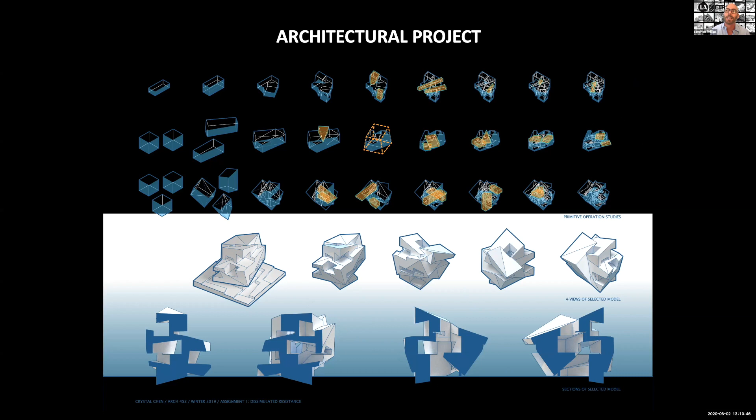Just to give you a quick brief on what our projects generally run about. I always start, since they're 2 quarters long, with a formal assignment dealing with primitives and semi-pure geometries, working to create an architectural form that has interiority and exteriority and creates different formal shapes. Everyone develops their own project, lands it into a site, and that becomes an architectural interest they take into the design project as they develop it.

We initiate a program a few weeks into the class, and it's usually quite large. This is fourth-year students, undergraduates, BArch. It's an urban design type project within Los Angeles.

Our program this year is 660,000 square feet. It's a multi-income housing project with 2 hotel components, a transient hotel and a boutique hotel. We also have social and health services built in, transitional family housing, creative office spaces and retail spaces, and substantive public interior and exterior urban spaces of the in-between. That's what the design tends to be about.

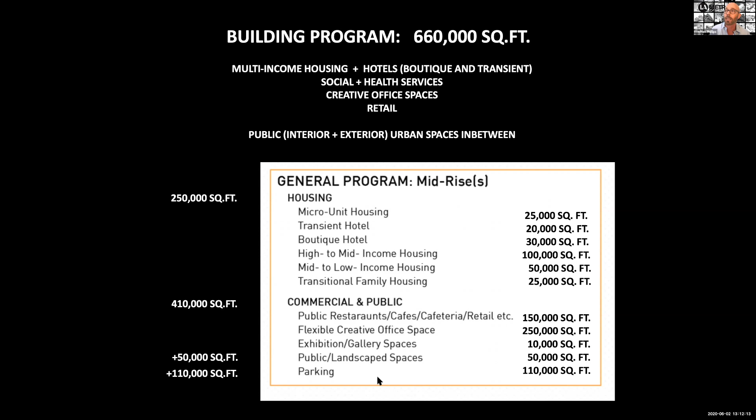About 250,000 square feet is given over to micro units, transient hotel, boutique hotel, high to mid income housing, mid to low income housing, and transitional family housing. There's also commercial and public spaces, restaurants, cafes, office space, exhibition galleries, landscaped public territories, and parking. The site is in downtown Los Angeles.

Here's downtown, here's Skid Row, this is the fashion district. We sit on that edge condition between this larger high-rise territory and the move towards low-rise, more industrial kind of environments.

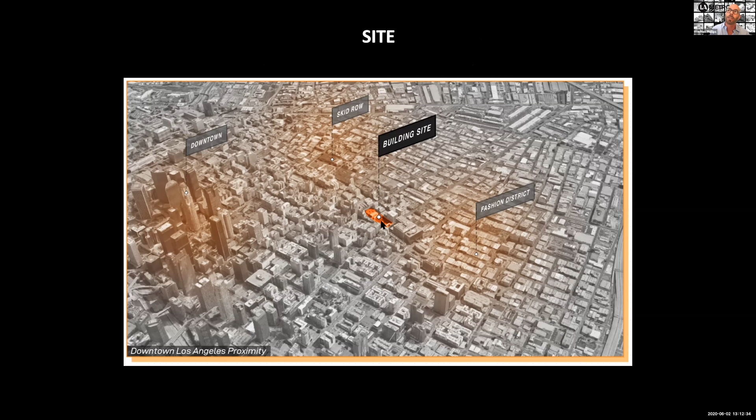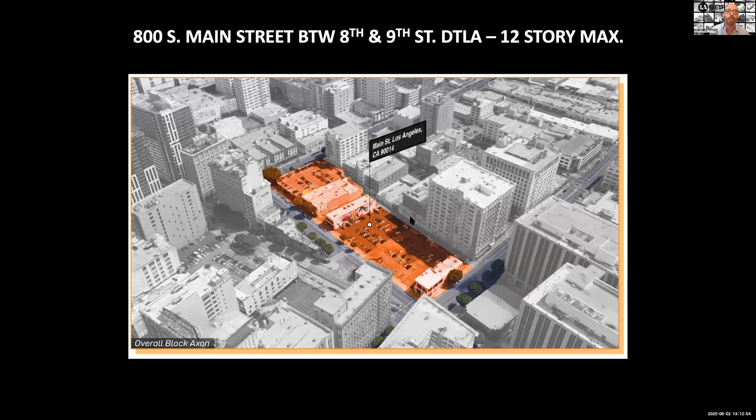It's on a street right off of Main, between 8th and 9th Street, and it's pretty much a fairly empty lot. We've taken the entire lot for the student project. It has this interesting open space right in front of it, and we took the general standard of a 12-story building max for the project as a whole.

This gives you an idea of the lot off of Main Street between 8th and 9th, with an alley running behind it. Generally speaking, it's a 12-story project with 660,000 square foot coverage and a 110,000 square foot lot, so we have about 50% porosity.

It's guaranteed they're going to have to manage a type of open indoor-outdoor space, also with hotels and housing usually requiring a more narrow kind of spatial feature than the lot. The lot itself is 175 by 625 and has a very strong elevational quality.

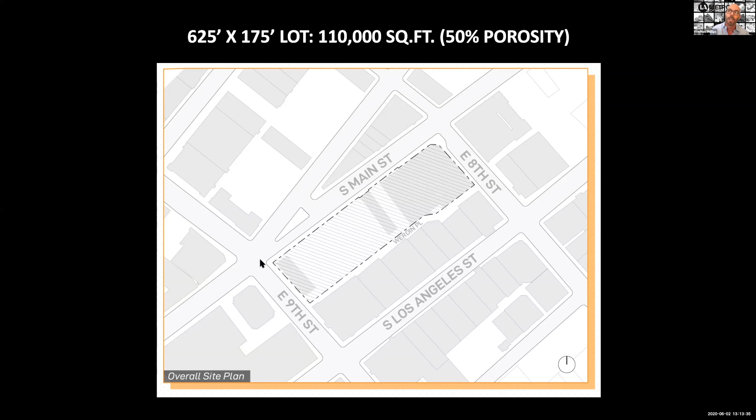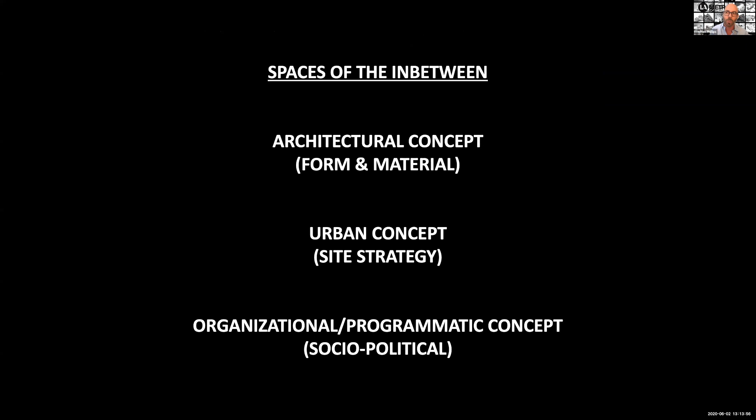The topic is really about those spaces of the in-between, and how we design and inhabit them in relationship to, one, having an architectural concept that's form and material; having a strong urban concept that deals with site strategy; and then maybe a socio-political perspective, usually through how you organize and program the space.

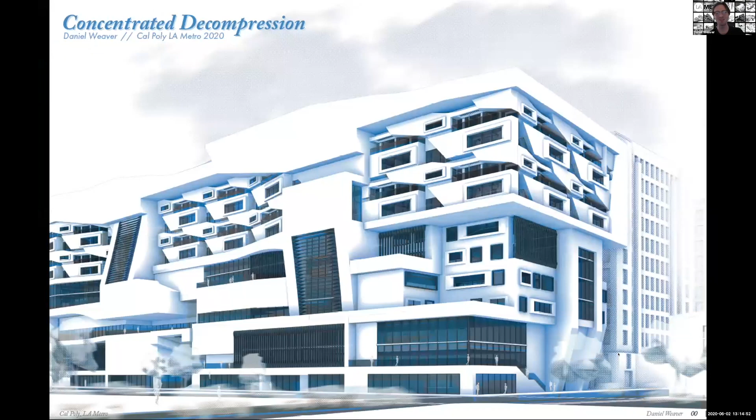Stephen already covered a little bit about the site and what was happening there, so I'll cover that pretty quickly. Essentially the site is located in the Fashion District in southern downtown Los Angeles, and it currently hosts a mix of retail and restaurant space, as well as office space and light manufacturing in the adjoining buildings behind. The unique difficulty of the site is presented in the dimensions of the elongated block, nearly 625 feet long by 175 feet wide.

In addition to the elongated site came a complex program. The building is mixed use, containing retail and restaurant space,

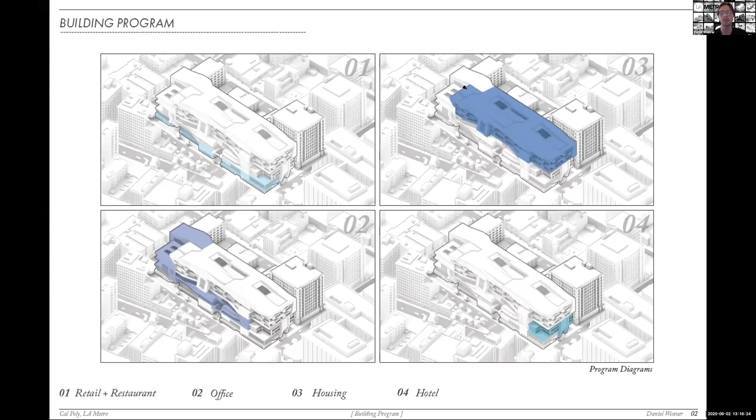a boutique hotel, a transient hotel, creative office space, and a range of housing units, including transitional family housing and micro units. Because the program was so complex, in order to give clear organizational strategies to the building, I played off the existing context by placing retail and restaurant on the bottom floor, then topping that off with creative office space. Finally, the hotel spaces populate the right side of the building towards 9th Street, with the housing units merging towards the top area.

Along with such a dense program came challenges of decompressing the space in order to provide moments of rest in the nearly 660,000 square feet of program.

So explorations of initial formal studies of the project revealed the unique potential to erode the interior of a mass through the differencing of objects through the exterior. This erosion of the interior space not only acts as a decompression of a dense object, but results in a unique inside to outside relationship with these void spaces.

Following through on these formal studies, the building creates void spaces to serve as a programmatic and spatial decompression inside. As seen in the diagram, the voids take advantage of skylights on the top and covered exhaust on the side to bring cuts through the building, adding internal porosity, natural light, and fresh air. In addition, they create a great ability to transition programs across the floor plates.

Taking a look at the ground floor plan, it doesn't take full advantage of the programmatic divisions using voids, so the building itself cuts back in a similar way to provide porosity on the ground level. Here you can see an array of retail and restaurant space, as well as the lobbies for all the programs above.

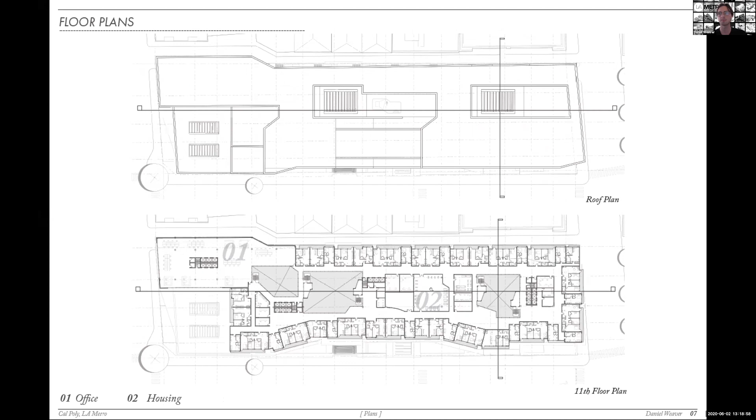As we take a look at the cross section, it was really important for me to take advantage of the open space, the voids inside the building, in order to blend the vertical divides between contrasting programs and communities.

These same connectors can act as programmatic connectors as well, with a more tailored program to that. For example, using something such as a cafe and seating above to draw people from maybe an office space and housing units to occupy the same area together.

These spaces were very vital to the building as they create opportunities to share interactions between contrasting communities and provide opportunities to blend the dense program.

Finally, getting into a little more detail, the building uses a steel structural system on the left side with large, about 7-foot deep trusses spanning on the 6 floors as well as the roof to help span over top of the large voids and the porosity on the ground floor of the building.

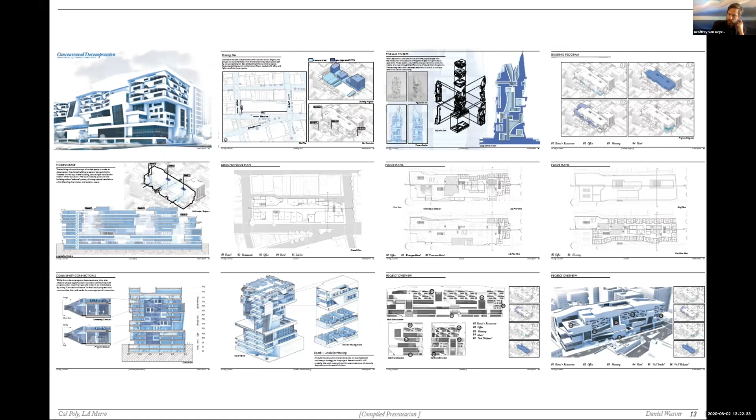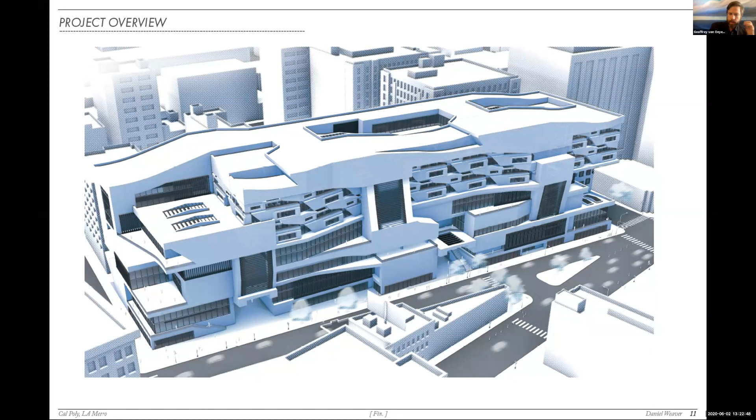Could you put your final image back up there? Yeah, I think the way that you illustrate some of the housing units as these smaller, highly unitized elements on the facade within these larger programs that are slotted together sectionally, and the way the cross section of the building reveals those mixed community amenities, I think that's quite successful. That's working from a massing and a spatial quality as well.

I'm wondering if you have any other images that might show what that looks like on the inside of those voids and what those void spaces might look like.

Unfortunately, I wasn't able to finish the interior render for that area, so the cross section is one of our best shots. You can also see it if we look at the detail chunk. You can begin to see the void being cut through on the left side here, and get a 3-dimensional concept of those programmatic spaces punching out into the void.

But as you were saying, that was a very important part of the program to me, because the program was so dense. It was actually really tough to figure out ways to give the programs the space they needed without entirely isolating them from each other. That's where the voids provided a really great opportunity for that.

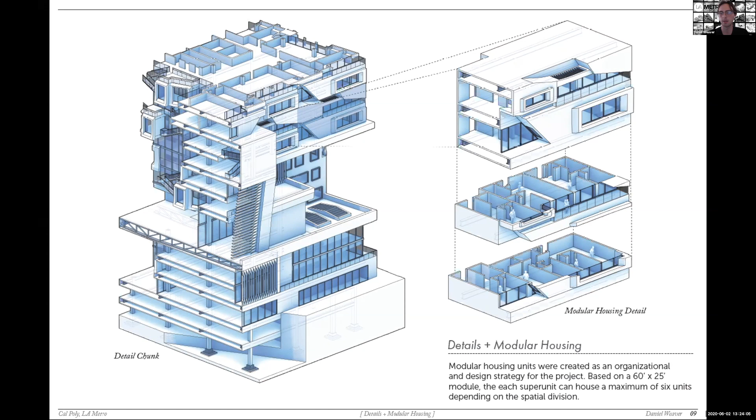One thing I can't tell is inside of those voids, and maybe a longitudinal section through the void would show it as well. I'm trying to see if the interior elevation created in that void space has the legibility that the exterior envelope has, since you've been working to create quite legible exterior massing. Is that to be as legible on the interior, or are you blurring the programmatic differences? What is your intent?

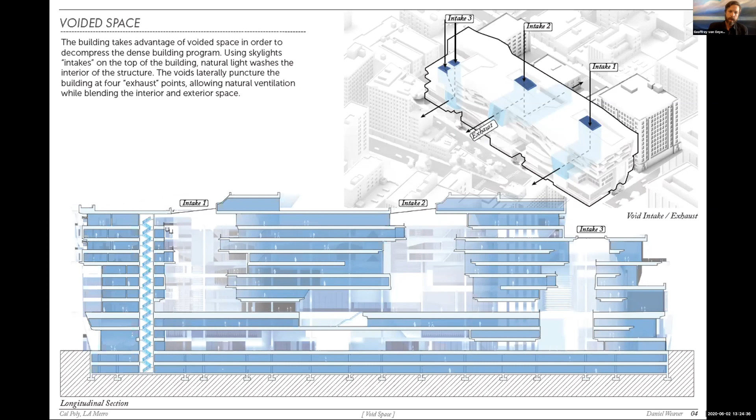If we take a look at the interior, I think one of the things I wanted to bring from the outside was this idea of wrapping coming in, which is these white objects right here, which are not the community connectors but help divide up the glazing on the inside. But I think that's actually a really good point I didn't consider, bringing the exterior facade language onto the inside and continuing to show that programmatic change through the interior atrium.

I think you did a good job on the exterior of modulating the different scales and showing the programmatic relationships on the facade. The interior seems more two-dimensional or something, in the sense that you are illustrating a relationship between glass facade and program shared spaces. I think the richness of the exterior programmatic form relationships could be better articulated on the inside.

But overall, compliments on the project. Very thoughtful. Thank you. Yeah, I agree.

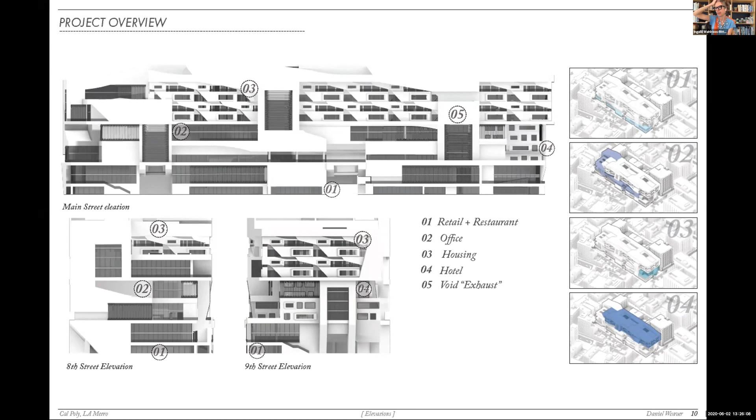I think the modular strategy that you described is a very good one. And as Jeff mentioned, there's a clarity and you begin to understand the pieces and how they come together when you see these overview shots.

There were two pieces I was particularly interested in. One was your formal study that was early on, and I thought the clarity of that diagram was great. I have to say I missed it a little bit because there's a whimsy to it, or a clarity...

That is missing, and I do think it's these internal spaces that get blurry. In this diagram, the figure-ground relationship is clearer, even if the interior spaces are less traditional atria, I think they make for more interesting architectural spaces.

So I wonder if some of these ideas might find their way back into the project as you begin to skin those interior courtyard areas. Yeah, that's actually a really great point. Self-critique is really important as you finish up a project and start producing things. I agree the void space did start to lose a little of that whimsical quality.

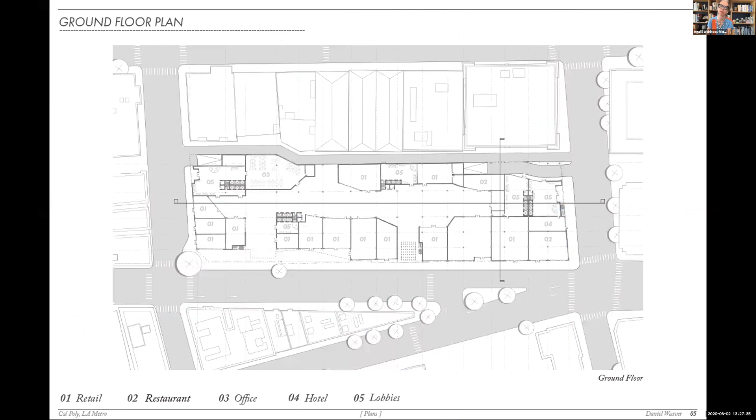It gets a little mushy also, and here there's a clarity to it that I really like. The other piece is the connector piece, and I think you could really amplify those. You need to commit to them and understand them. I feel like they don't have enough personality.

I wonder if a material, a color, that there's some, they almost look like they could even be mobile. Maybe I've watched too much Harry Potter with my 11-year-old, but the idea that these pieces could actually begin to, there's almost like a plug-in idea for it. I'm just throwing that out there, I think they could do more for you.

Maybe I'm falling back on less architectural and more playful suggestions, but architecturally, doing that will give you a richer programmatic blend—what happens when housing encounters restaurant. You could really use them as ways to test out programmatic overlap where there's discomfort, but really heighten that, especially in today's circumstances.

Anyway, congratulations on the project. It seems to me those are two areas that you could really amplify even further. Yeah, thank you very much.

I think your comment about the idea of moving less towards architecture and more towards playful design is a really good critique for the project.

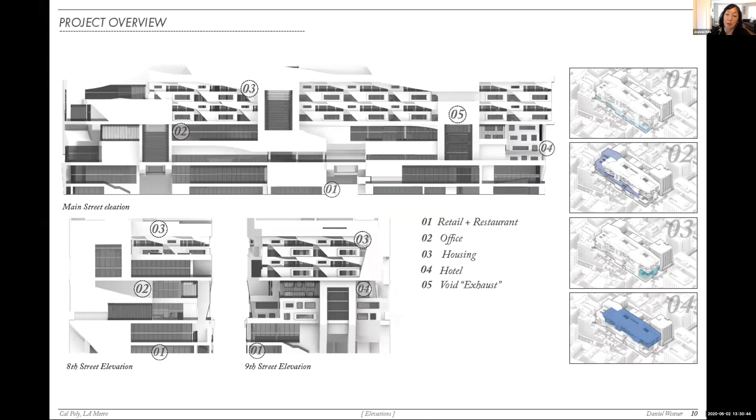As an extension of that, I think one area that maybe could have started to percolate is on the overall massing. Is there a way for these things to get a little larger and start to create almost these urban rooms? I know you have them at street level, but I don't know this site.

I was thinking in particular about the alley edge and the proximity of the buildings behind it, and wondering whether a larger urban voiding strategy that punctures out of the facade might have been a way to start blending, as you were saying, program, but also blending edges between the project itself and some of the things it's aligning with on the site. Yeah.

Yeah, that's a really fabulous point. I think being able to take that same strategy and apply it as an urban strategy, or bringing those voids down and out onto the site, is a great idea—something I didn't consider as much while working through the project. So thank you for that feedback.

Hey Daniel, this is Tom. Hi Tom. I'd like to echo the three previous comments—congratulations on a great project. It's very articulate and a beautiful presentation, so thank you for the clarity of the drawings. It's really nice to see the work.

My comments are similar to the previous ones, relating to these open spaces. I thought Ingalill's comment about the transition from your earlier studies to this more modular system was great—you're doing a good job breaking the scale down, but I think you're losing a bit of the balance and sculptural qualities from your previous study. As it becomes more fragmented and nuanced, it'd be great to work some of the larger gestures back in as you carve the spaces out.

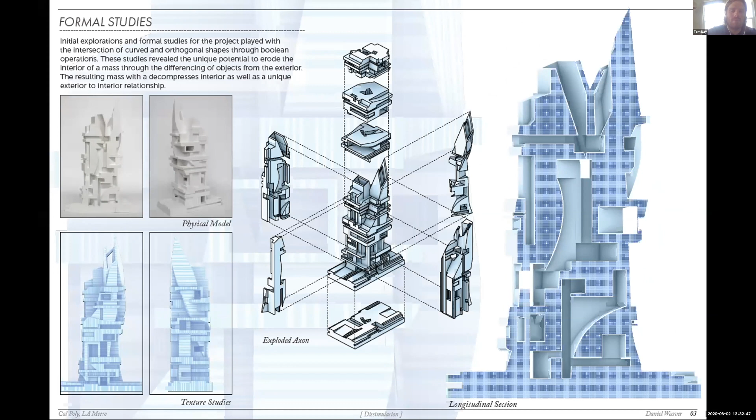The next point is about your void spaces—could you go to this section? The cross section or longitudinal? This is perfect. I think it's really great how you've activated the interior of this building, and I especially like the elevated piano nobile, which could offer a whole range of possibilities for this augmented piece of landscape on an upper level.

If you know this site at night—not right now, but typically on a normal weekend—there's a very busy intersection where all these commercial and retail spaces come together. This opportunity to draw the public up into other levels of public program in the building is fantastic.

I can't help but think there's a missed opportunity in going down as well as up. Right now you're using the ground plane as zero, with parking below and the project above, but it could be a fantastic complement to this intricate space you've created, with a pedestrian entering the building looking up and down at these juxtaposed programs.

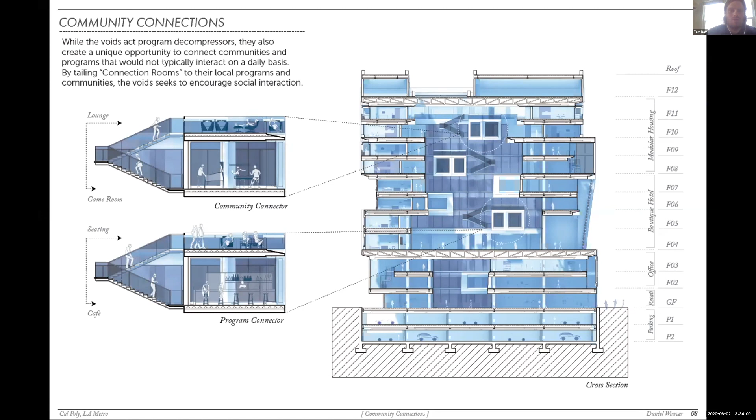Also, if you could go to the overall image—this is just a comment about the ground floor. I think some of the intensity you have in section is lost a little on the ground floor plan. I understand you're bringing in a lot of retail, but you're making this great move of creating new public spaces up and down from the street level. I think you have an opportunity to void out more of that ground floor space and bring more of the public up into your building.

I think the commercial retail storefronts you have aren't necessarily strengthening the very powerful project you've made. That's just a minimal, slight critique, but overall, great project—thank you very much for the work.

Thank you very much, Tom. If I have a chance to respond, one of the things I was struggling with while creating a building in an urban context was the idea of holding a site boundary, for safety at night when people are walking around—your idea of opening it up to a large space makes sense, since it's the small nooks and crannies that become dangerous. But bringing those voids down, creating void space not only up but also down, could be a wonderful complement to the building. So thank you very much.

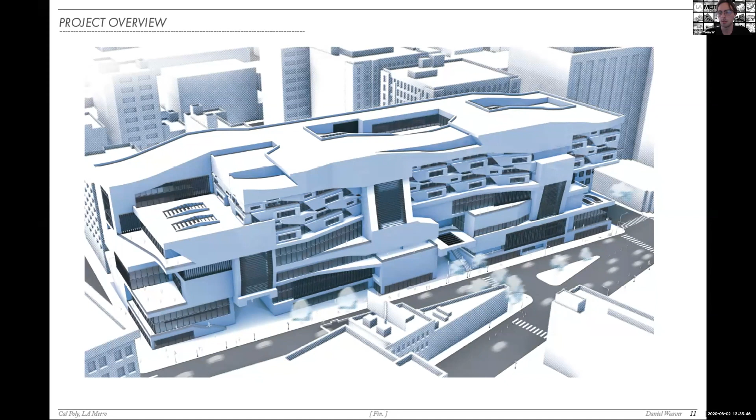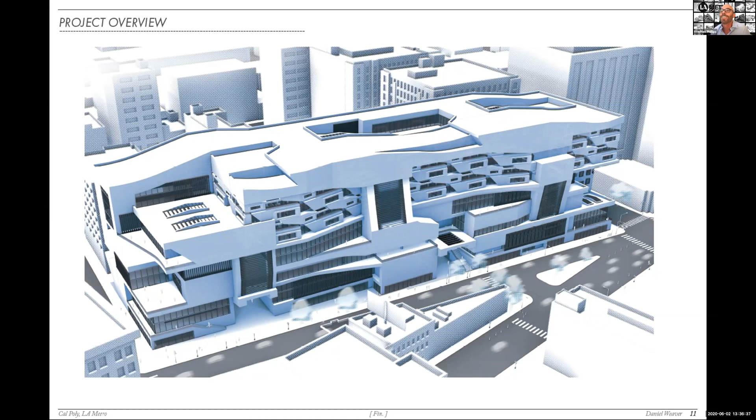I think that was a really great review—thank you for the commentary, everybody. Danny, you've worked extremely hard, so I'm really impressed the whole time. You're very consistent too, always have been. I agree with Ingalill's comment and the rest of the group—I've been pushing on you endlessly about how cool the starts were, that first project and the spaces. Most of our students struggle with that kind of interiority of the building having shape and being okay with that. I'm not sure exactly what that is, but I think you've pushed yourself really hard, and this project came very far. Everyone's noted lots of clarity in the way you present this work, probably one of the most outstanding on that level. So thank you, and we're going to move on to Reann.

Are you there? Great, thank you Stephen, here we are. I'm here—great, so you can start sharing my screen. Yeah, okay. Sorry, give me one.

I also want to say before you get started, Teddy, Ismael and Pavel are out there in the group. If they want to, at some point, say something, please make your comment. There they are. We're hiding ourselves, so it's just the critics, so we can take the photos.

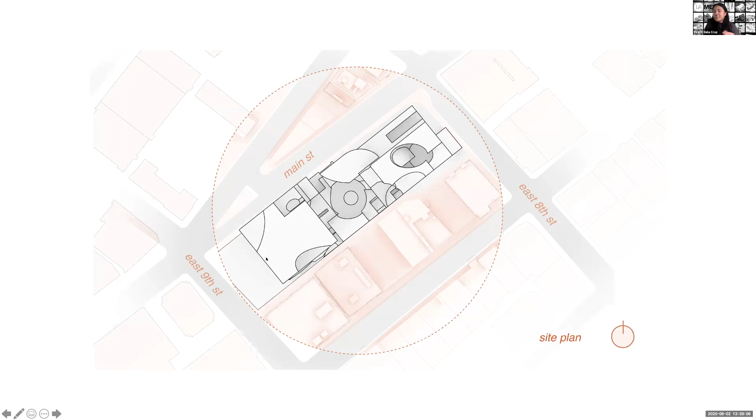This is my site plan and how the building sits on the site. I wanted to allow different areas of the site to be open to allow that permeative movement to be embedded within the program and the building.

Bringing in the idea of that collaborative core, I wanted to lay these programs out in a way where they were able to interact with one another in a respectful and appropriate way, allowing different spaces and the cores themselves to be flexible.

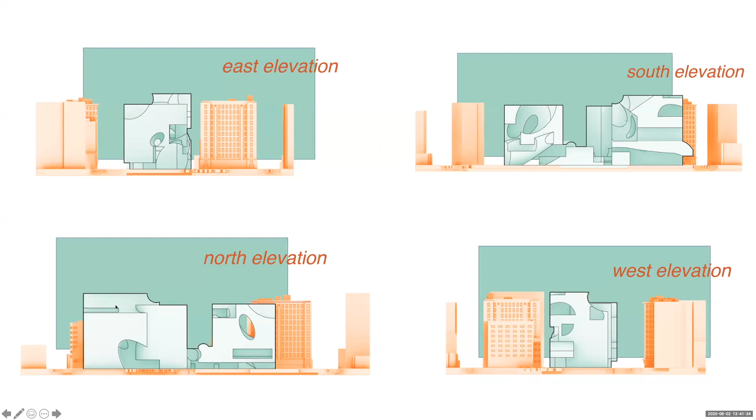These are the elevations I've produced. I wanted to find a balance between the monolithic quality of my building, but also allowing for that permeative movement to be evident. There's open space and the building is essentially split in two, but there's still a sense of connectedness that I wanted to implement and make evident in the design.

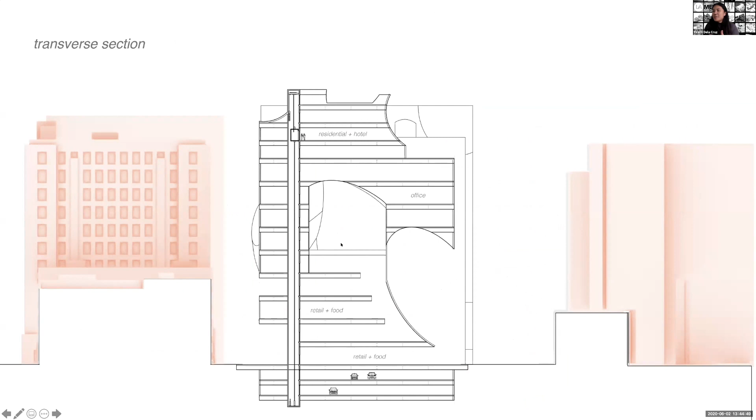So the gradients I've articulated here are those shared spaces between the different types of housing, hotel spaces, and public spaces like a library and a reading nook. In my cross-section, I wanted to articulate that atrium space - it's still being developed, but my goal in having this atrium space is to have it be inhabited, not just as a void space. That's something I want to continue pursuing.

So thank you for your presentation, Reann.

So you probably know this, but a core in architecture parlance is typically the elevator, the stair - it's a physical solid. And you're using core to define these voids, to describe these voids. I think the idea that a void is a core is an interesting one. But then in some of your later plans, you put an object or the elevator conventionally in the middle of that space, and it seems to me that's kind of violating a little bit of your idea of these spaces.

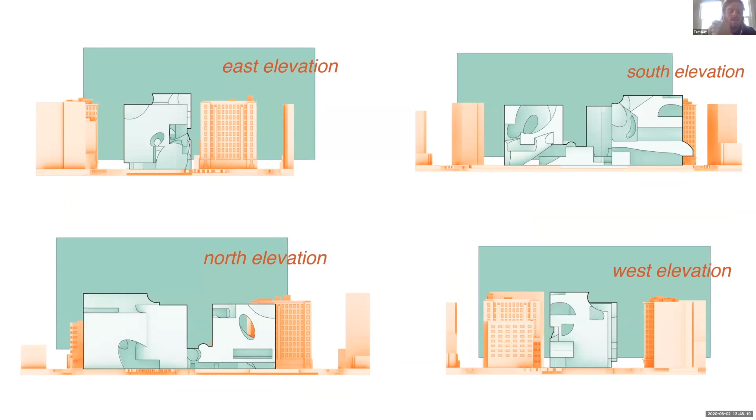In this case, you're kind of purely subtracting. But as you're breaking up these plans and looking at the program, it feels like you've just taken this plan and applied program to it. But I'm wondering if some of those programs can start to take on certain characteristics of the subtraction or the additive.

And so when you're thinking about the core as a void, that's a great idea, but also your elevator shafts — do they always just need to be something offset somewhere in the middle of the mass, or can they express themselves as more additive, solid pieces that help develop your language to be both positive and negative subtractions on your mass overall?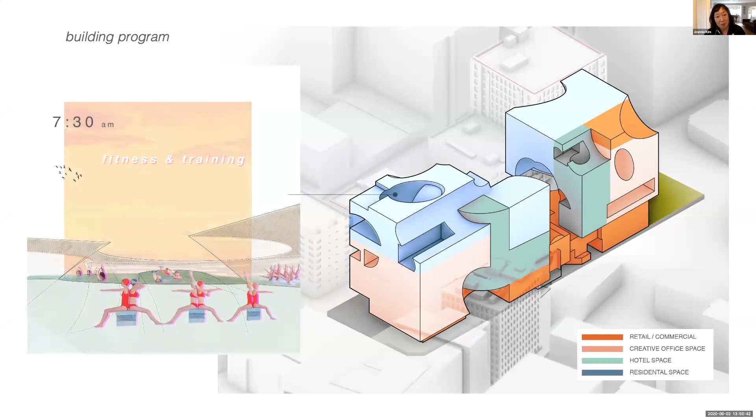But I wanted to pick up on that point and the kind of double meaning of the word core, because I think that, like everyone else, you know, this moment where you're implying a kind of 24-hour occupation of these spaces, and then later on when you describe them almost as gradients — I like that characterization of what these additive subtractive moments might be.

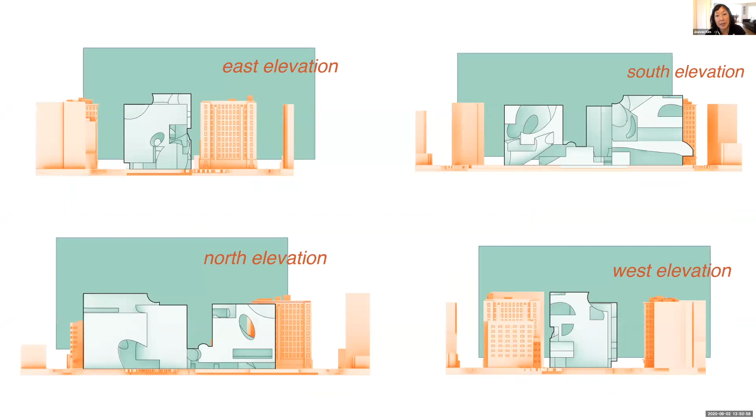But I wonder too, because of the way that you have distributed the program through the site, it means precisely that the conventional core, the elevators, and the hallways and the stairs become super important in terms of how people circulate to these spaces and then occupy them.

So they're not just appendages to these spaces, but I feel like they're part of the performance of how these spaces get used. So I think that could have been not only a way to rethink their role and not just place them in a perfunctory location, but also to think about how they produce this kind of social mix that you seem to want to have in the building.

Yeah, that is a really good point. I do need to think about that as well. Thank you.

Yeah, Reann, I'd like to echo the other comments that my colleagues have made about the relationship between form and program in your project. I think that's something worth studying — this is a longer term project that you've started, this relationship between solid mass, void carving out, relationship between orthogonal grids and curved walls.

Are they always extrusions? Sometimes they're extruding vertically, sometimes horizontally. You have some of these diagonal or curving extrusions happening as well. So looking at those techniques, I think you have a beautiful hand, a beautiful eye for these moves. Sculpturally, the building has a lot to offer.

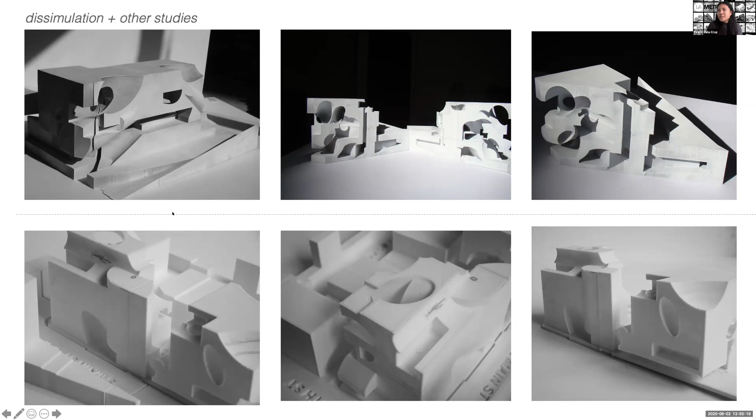Yeah, it's a trick, right? Because I think the housing units are probably folks who would want a balcony, or they'd want some way to open up to fresh air, or they'd want something. That facade would be a different quality in some way than some of the larger commercial program spaces, or even some of the shared spaces. And certainly the void spaces have their own qualities to them. I would think that as you develop the project, you'd start to work this through in your drawing, using wall thickness and line weight to differentiate what is more solid and what is more open.

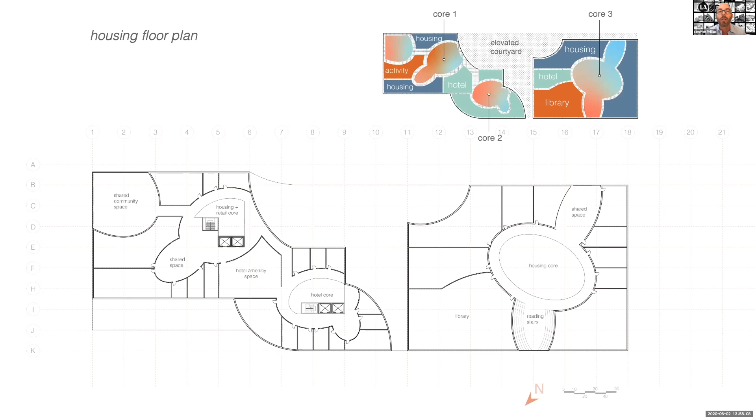But yeah, for me, I'm also very grateful that you didn't give up on the difficulty of the beautiful forms you were creating, and that you tried to find a way to make them work in plan and section. I think I agreed with everyone that some of the second diagram, the first real diagram of your project, was really hopeful. That one that showed - you can go back to it, it's very pretty. Thanks, that one - go back, go forward. The Paraline view, the axon.

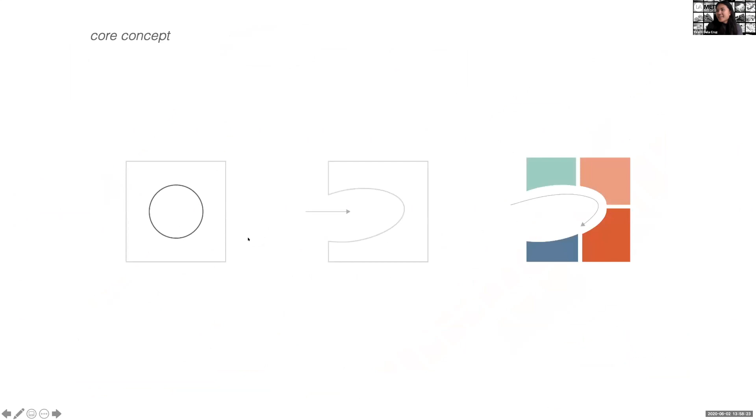Yeah, the axo, okay, one more. There you go. That one shows to me that you were starting to really hold on to the things that were complex and difficult, but also quite beautiful, which you have a hand for, but then also trying to figure out how you might program those spaces. And I think, you know, Ingallill's comments with Jeannie's as well, how you end up putting the elevators and things within those voids and what those voids become programmed, how you program the voids to be exciting - that could really help you. And then as you get into development of skin, that's also going to help.

So there's a lot of wonderful things that you're working on. I'm very grateful to have had this opportunity to work with you on this, and I hope it changed the way you pursue your next project. I do hope you get a little further on development aspects, because with people like Pavel, Teddy, and Fabio—I don't know if you got to structures, or wall sections, but that would have added a new conversation, as Jeff was adding in there. Getting to the skin would also reinform how you might reevaluate and try to hold on to the beautiful masses. So hang in there, and I really appreciate it.

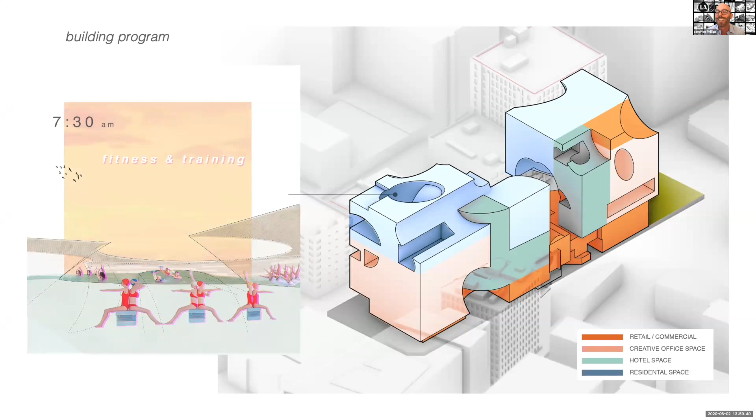Pavel, you want to say anything? No, we didn't get the chance to develop this aspect of the project, but what I see here is very promising, and she has gone a long way. It's a really beautiful project.

I can help her with the solution of the facade, and Fabio for sure with the structure. If she has the desire to continue with this project, please contact me—no matter that the semester is over, we still can figure it out. There are many solutions, I don't want to drop them right now in the jury. It's a matter of discussion. But...

I admire the color palette which you're getting there, and it's very challenging in terms of enclosing the space. Sometimes a project is good to stop at a certain point and leave it for another time to develop further, and the beauty of it is to be as abstract as it is right now. So I think it's a really good project.

Great. So let's jump to Ivan.

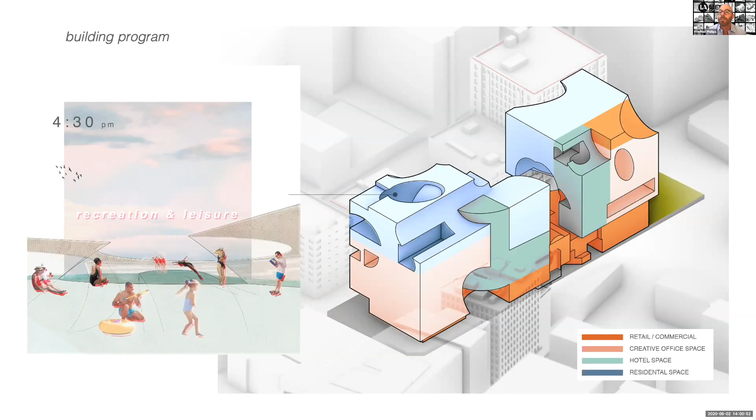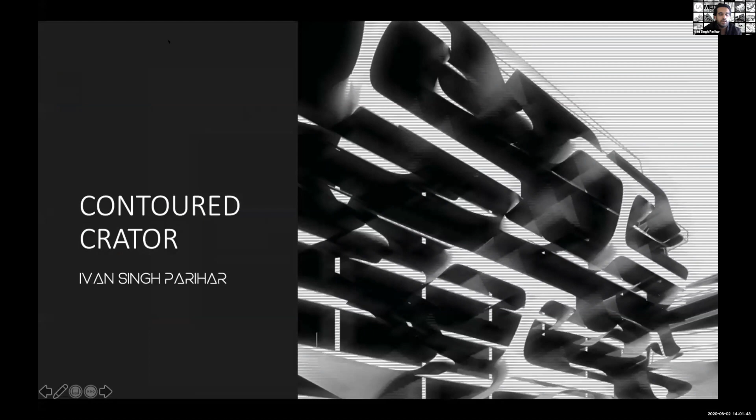My name is Singh Parihar, and the name of my project is Contoured Crator. Primarily I was investigating relationships between different surfaces and their impacts through forces and diagrammatic strategies. This was my disk simulation exercise, which got me interested in different surfaces, curvature, convexities, and concavities, and their impacts sectionally and in plan formats.

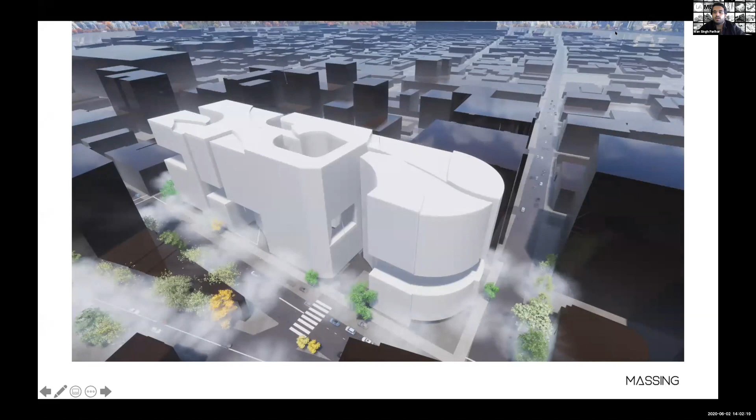So the way I decided to go about this project was to analyze these geometries in a more systematic way so I could involve them with the program. I started off with a massing with cuts and features I liked from my disk simulation project. This allowed me to provide certain cuts and openings and influence my programmatic decisions as to where I wanted to place what kind of program.

The way I tried to go with the program was to have the residences on the top levels, the hotel kind of in the middle, and the office storefronts on the lower levels.

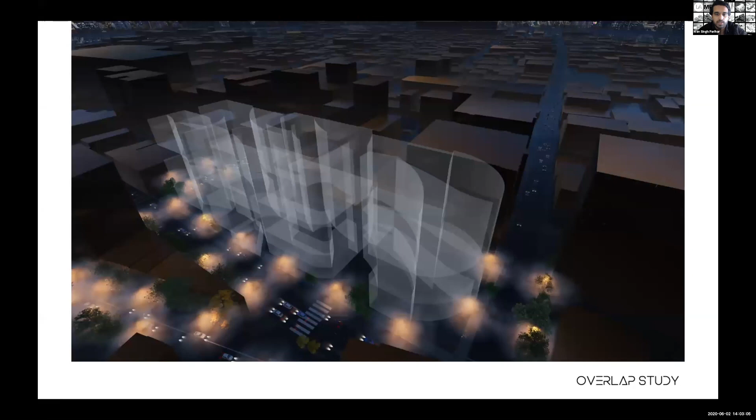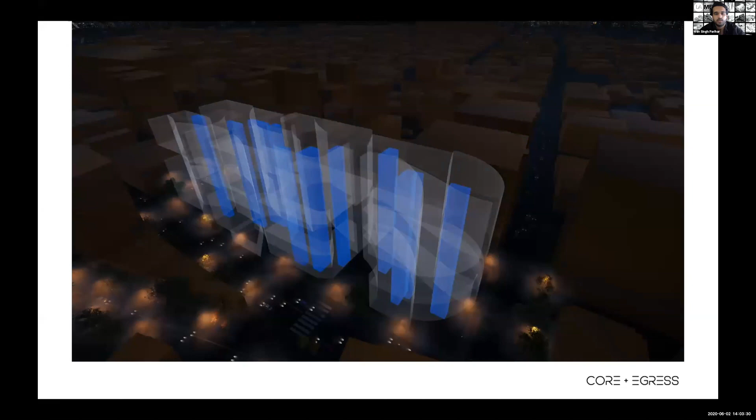To add the convexity and concavity from my previous model, I started analyzing these masses in terms of overlaps, which would tell me places that might be able to host certain features in the form. To make these experiences more observable to the occupants of the building, I decided to add cores right through the points where there were potential openings in the geometry.

There were certain parts of the project which were cantilevering, and there were massive cutouts, so it features two kinds of structural systems.

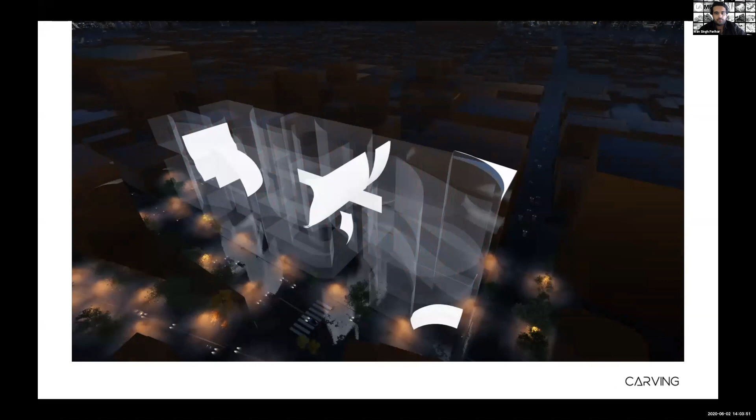Then I decided to find the position for certain kinds of cuts in the massing, which would allow space and more light, and interact with the facade of the building.

Then I added certain morphs, so I could add a level of dynamism in the building, and these morphs are located towards the front side of the facade, so they are actually integrated with the envelope in some way.

Then I did a texture study featuring how I can utilize these, to read the geometry in a better way, and that every geometry has its own unique points.

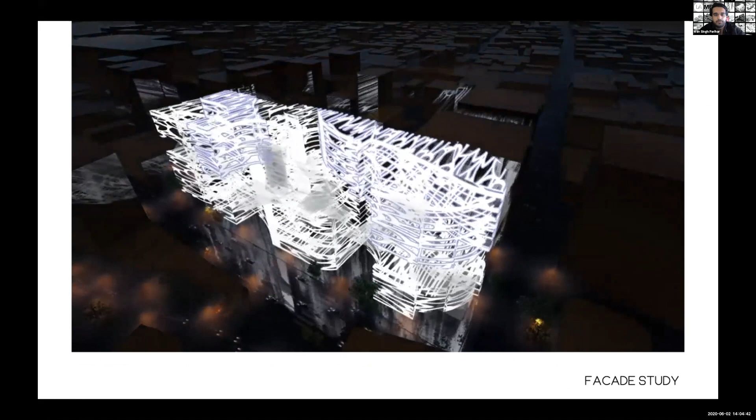This is a little animation about how I started thinking about the facade, how it can wrap around and unify the entire building together, yet having a unique touch to each face by adding certain kinds of variations in the facade.

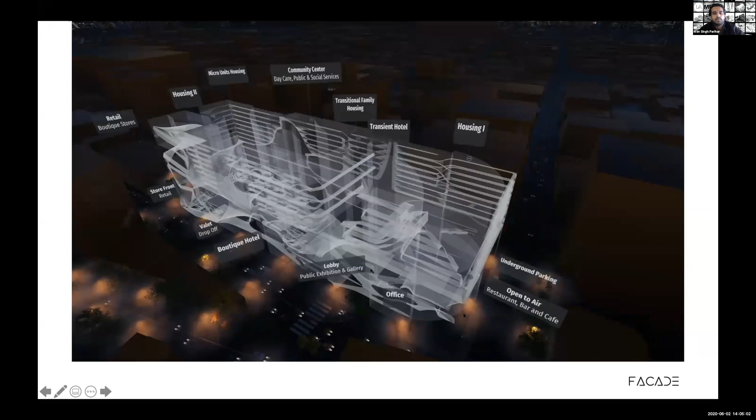Then I simplified this study into a more programmatic way by creating different kinds of facades for different programmatic functions.

Then I started working on the building envelope, which seals the entire structure by creating certain voids inside the building. These are my sections, which are conceptual, but they express how different programs come together, and these sculptural voids help maintain certain needs for the program, such as privacy or visibility concerns.

While traveling through the elevator on the core, occupants are able to observe different cutouts through the building, because the center part is where all these geometries come together and create opportunities for Booleans and subtractions. I tried to express a similar thing in the floor plans, where you have an atrium which has a landscape feature next to it, social services on top, while the residences are their own unique clusters.

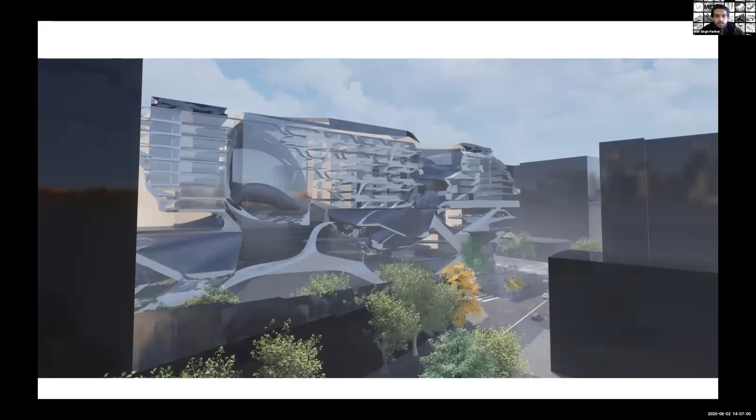And these are the renders. I was particularly interested in blending different facades and different programs together, so it creates its own unique language which expresses the diversity in the program and the complexity present inside of it.

This is the front view of the building. I've been interested in screen systems where it could be used in places such as retail and office, so it could allow light inside. The facade elements on the residential units have a potential of being balconies where people can actually come out, because they extend quite a bit towards the street level, so it could be a possible opportunity for the occupants to have a better interaction with the site.

This is the night render with the different programs. I was interested in these big cuts which separate the program in a way, so it could also help provide privacy needs between different units, as well as provide sufficient lighting on the residential units.

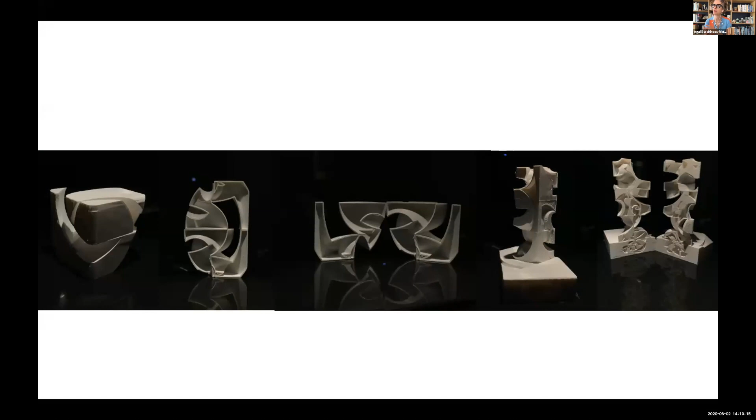What I was missing a little bit—I did appreciate a lot of the efforts in terms of facade, you talked a lot about the facade, you talked about these cuts that separate programs as ways of an organizing strategy—but what I didn't hear, and I wonder if this could help guide the project further, has to do with what does it mean to have a hotel room, and what is the formal language or typology of, say, a multifamily or housing project, different from an assembly space. How would that lead you to make decisions about the cuts, the size of the cut, the amount of light coming through, the space between the pieces?

I wonder, because I think the sections are really powerful, and it makes me think that the plans should be equally powerful, and they're not. In other words, given that your cuts are sometimes horizontal and sometimes vertical, I think a strategy to move towards is that the plans and sections are very similar, because you're creating occupiable space using very similar planimetric and sectional strategies. So as I look at the plan, I'm less enticed than I am by the section, which gives clues in terms of ventilation and tightness of space and other factors at your control. I'll just leave it there, but those are just a few of my comments.

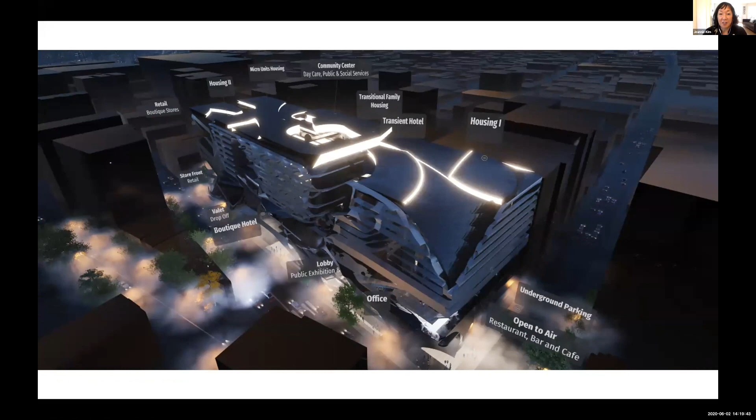Hi, Ivan. This is Jeannie. This maybe echoes much of what was said by the other panelists, but first I would start by picking up on that last point.

Because I think that somehow your project, more so than some of the others we have seen, seems to have this opportunity to actually enlist the ground plane a little bit more in some of the sectional moves that you are making, really imbricating the project into the site rather than having it just sit on it.

And so I'm glad you stopped here, because I feel like it's a very ambitious project with a lot of ideas. And so I feel like some of what is being said in terms of zooming out and understanding the big picture is also about editing some of the things that are creating some kind of hierarchy between the things that you want to emphasize.

And so to me, this conceptual section is one point, and then the facade and the animation that you created, and clearly your enthusiasm for it - I think those are the two moments where the initial charge of the project to address diversity and complexity are very present in those two images.

And then I think some of the other things that you tried to place into the project, and maybe - I don't want to say disappointment because it's not disappointing - but the fact that the plan doesn't have the same kind of compelling charge as this section does. I think part of it is the struggle of a project that is as large as it is, but maybe it's a question of editing some of the ideas that you had.

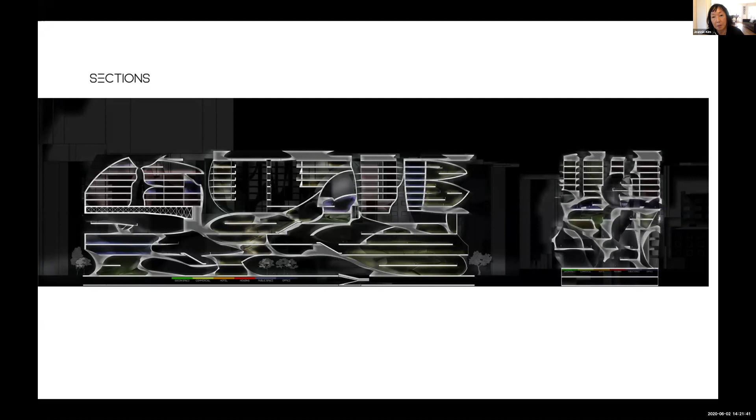So one thing I want to bring up that might have been helpful to address some of the comments already made - you made a reference at some point to an idea of poché, which I think could have helped with the materiality and reconciling this beautiful image with how you then deal with the program you've been given. I would just place emphasis on that as something that could have been one of the ideas that percolated to the top of the many ideas you had for the project.

Thank you. Thanks a lot. It was definitely very helpful because it was a massive program and all the feedback just made up a more clear picture in my head about what I have to do next with my project. So I really appreciate the feedback.

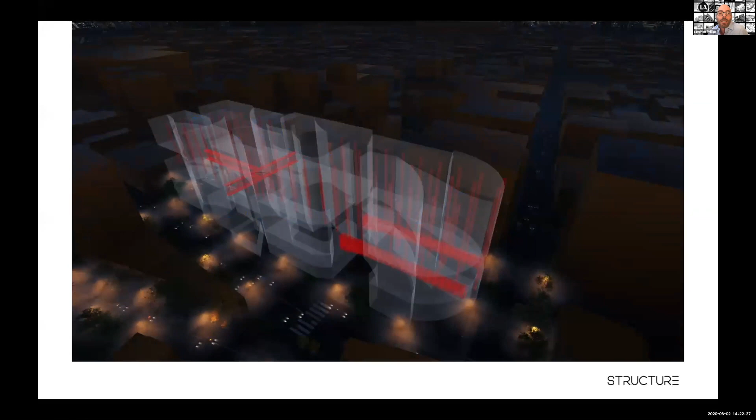Hey, Ivan. I've enjoyed working with you. You're very interesting in the way you've proceeded this whole time. I'm sure the other critics will think the same, but the way in which you came up with those really cool models to begin with, but had a struggle in the making of the model, which is actually interesting - you challenged yourself with these 3D skills, but then put yourself into a very impossible task ahead, and then kind of went with it anyway.

I find that you came a huge distance in terms of trying to figure stuff out, and that section still is my favorite. Just go to the building section because it makes me happy. I think it makes everybody happy. It has the most potential.

But what I find that maybe will help you further is I think you do interesting cinematographic techniques, like a cinematographer, that kind of hides some of your challenges. Kind of like if you think of movies these days, they always use lighting in a very tricky way to avoid actually having to make things, right?

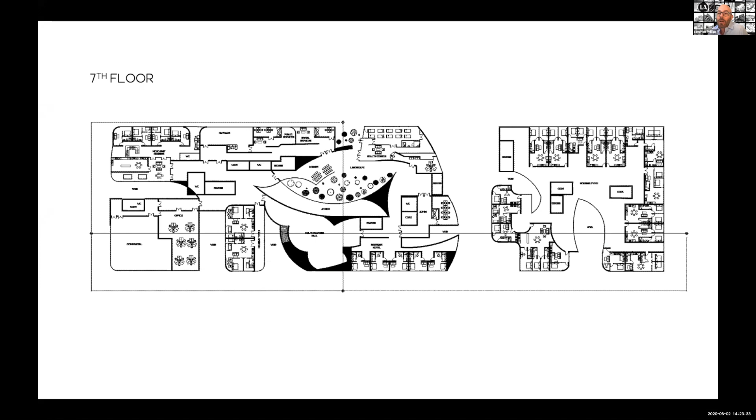So I think you did a lot of interesting rendering techniques and modeling techniques that keep you from ever having to draw, and I think they caught you on the plan. There's a 3D model that exists behind this thing that probably has a lot of information that may or may not match the plan itself, and may not work for every plan you proceed with. That kind of comes across in the section.

But I think if you drew more, drew more hardline drawings, and weren't afraid to draw in that format—we've been talking a lot about diagrams too, diagram and then draw some more—I think you'd find you could really work out some of these ideas you're having, so you can edit out the next to impossible spaces, which I know you did on the section.

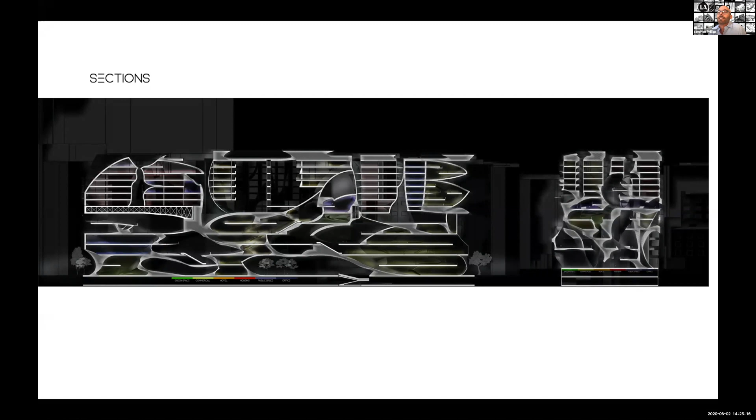So thank you all for taking the time to review some of our work, we're all very appreciative of your guys' time. This project of mine, which I call An Urban Within, is driven primarily by speculations on a mixed-use multi-housing project that aims to replicate certain qualities of an urban life concentrated within a city block.

Our given site is located on Main Street between 8th and 9th. The primary site entry point is on Main Street, as it allows for the most street frontage for the given site. The project takes inspiration from different zoning relationships present in an urban and suburban scale and translates it into a vertical format.

Much like how a city transitions from zones and districts as you radiate outward from the center, the project separates into 4 towers that are representative of different neighborhoods.

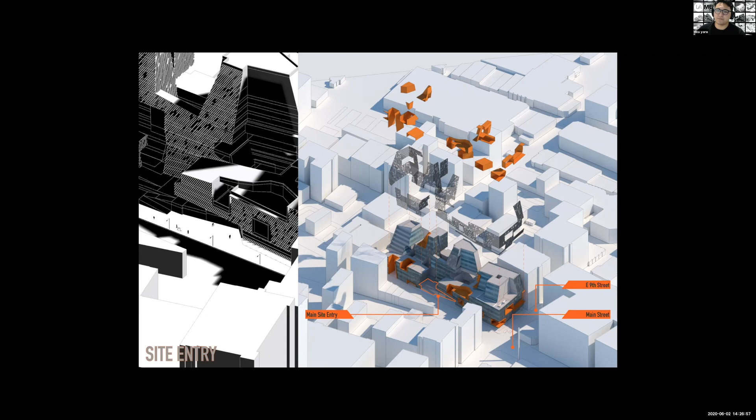The program was particularly interesting because of the wide range of program types and their varying necessities. Some program requires more of a public presence, while others require more of a private one. The building is separated into different zones that allow the street frontage to meet the requirement of the program and services. Although integrated in some regard, the creative and retail, hotel, and housing are separated externally and occupy different portions of the site, as you can see here.

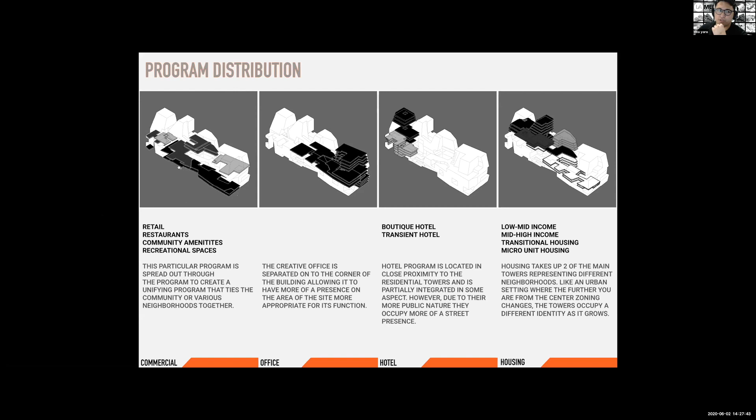You can see here that the office is separated from the hotel and housing zone, but is integrated internally through the use of retail.

On the ground floor, we see more of the independence of these program types having separate needs and requirements, with the hotel occupying a wider range of services, such as a drop-off for valet and a grander reception space.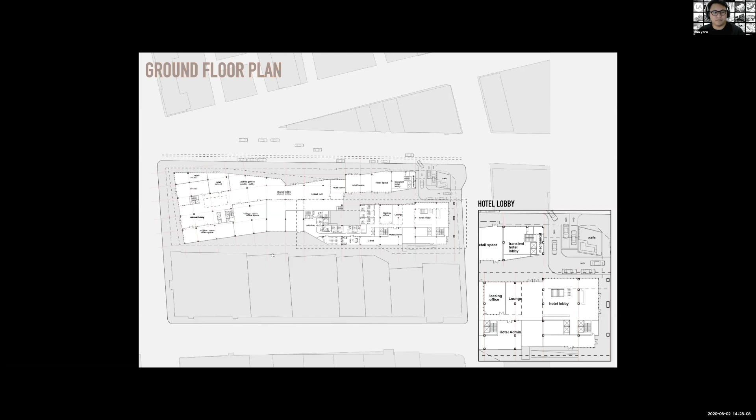On this particular floor as well, due to the nature of limited space allotted for the lower income housing, it was important to find a way to build community. So by providing the rooms with only necessities such as a kitchen, bathroom, and a small bedroom, more space was given to a shared lounge and more resources like a shared laundry.

On the right side, you can see that there are some more floor plans that are more diagrammatic.

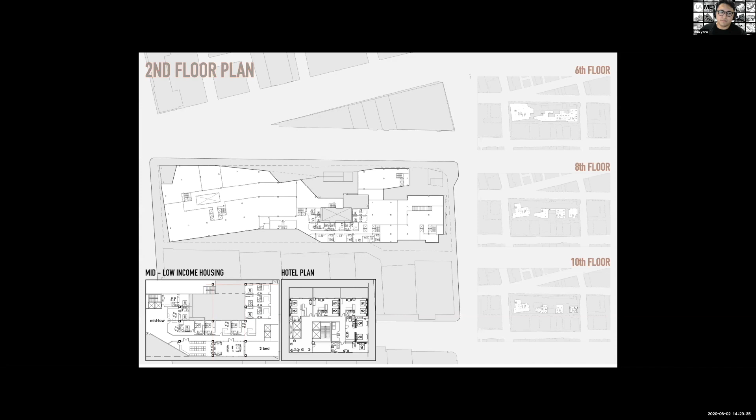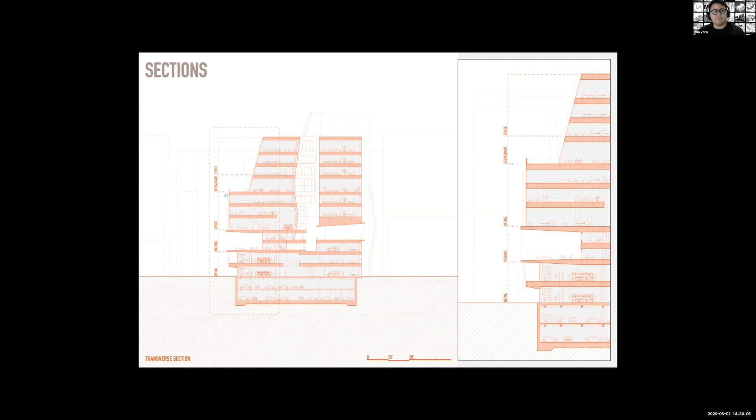In this next section, you see the relationship of the towers to voids in the form of courtyards. These outdoor conditions cater to the individual towers and create a sense of rhythm. There are 4 main towers and each tower has its specific void that caters to its needs.

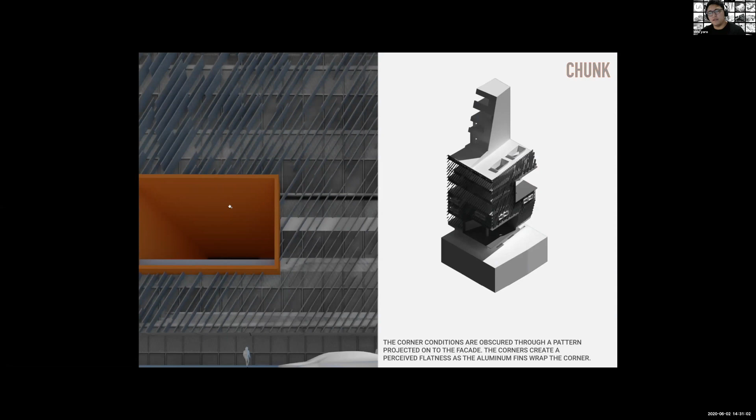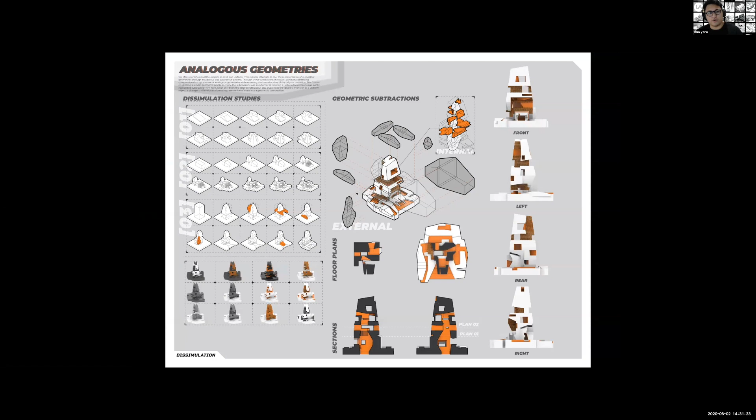Before I end, I wanted to quickly run through the inspiration for the language that was developed. This was a design study we had earlier on, and the goal was to use analogous geometries to create space within a space and figure out a way to undermine the monolithic nature of a solid geometry through subdivision and patterning.

You can also see here an early inspiration of the interior relationships of void spaces. They are internal to the geometry, but are external conditions. And so that concludes my presentation. Thank you for your time, and I can go to any slide you'd like to see.

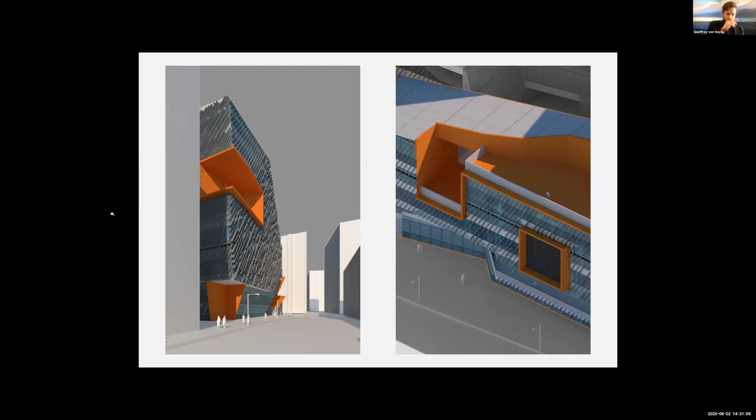So I do have a question. You call your project Urban Within. Can you just give me a 2-sentence summary of what that means, what you mean by that?

I was trying to create, or it was an attempt to have an internally focused programmatic organization, providing interrelations within different programs that are different infrastructures, much like you have a business district and you can also live within the building, because they're separated through retail, but still connected because they're essentially within the same compound.

So congratulations, I think your project is incredibly thorough, thoughtful, well conceived, beautifully drawn and delineated, so it's a pleasure to see it. It's curious that you ended with your studies because I see a direct lineage of some of the things you were studying there, then being articulated into clearly occupiable spaces that I think have character.

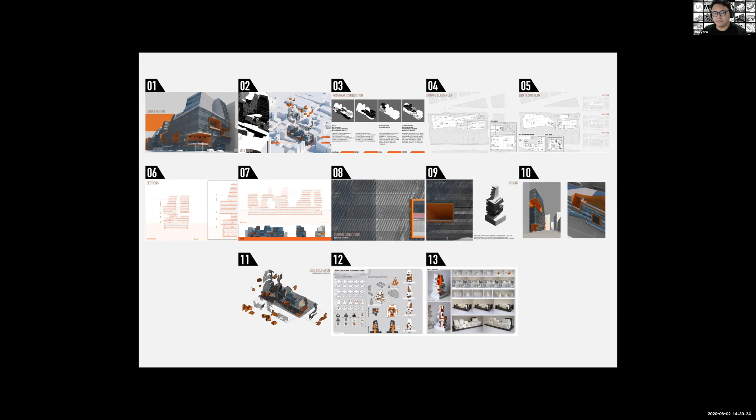Inno, would you be so kind as to flip back to slide 11? Yeah.

I just want to comment on some of the points made earlier, and I appreciate, Tom, your comment about the facade. I think one of the things that's really striking about this project is the constructability, the articulation of the parts. I really appreciate that about the project. The way you've articulated these social spaces and shared spaces in orange makes me think of almost a modular construction — you could begin to utilize something like that, then design what is site built, and then all of the screening and facade system as well.

I do think the flatness of this facade is a bit of a liability. I also wonder about the screen — does it ever go over the orange areas, or is the orange always exposed, never screened in front of it? In some areas it has a mesh, but like in this one, and there's one in the back corner where it's mostly housing related, I put a screen because if there are kids playing or things flying around, I didn't want to risk it.

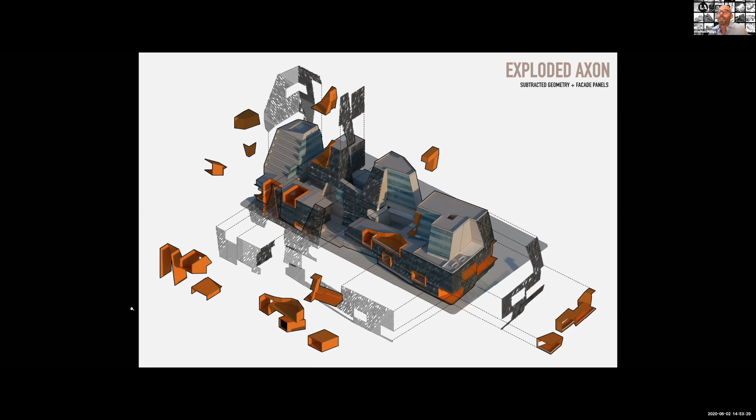Was that the Google campus? Yeah, that was way too big. Anyway, yeah, Jeannie. No, I wanted to similarly say I never would have assigned a program this large, and now you're telling me you had one that was twice as large, but to students.

But I think the way the studio was structured, with the dissimulation exercise at the beginning, but also positing it so that it was already calling into question the binary oppositions we sometimes take for granted when tackling a design problem, allowed everyone I saw this afternoon to tackle the project at an urban scale, but also at the scale of the program that you assigned.

But my question is simple. I'm just wondering where the name of the studio comes from. Like, what is the name of our studio? It's Flatlanders, so I know the reference. Yeah, well, I think that's a book, isn't it? Flatland is a book by Edwin Abbott, but I was just trying to figure out what it refers to.

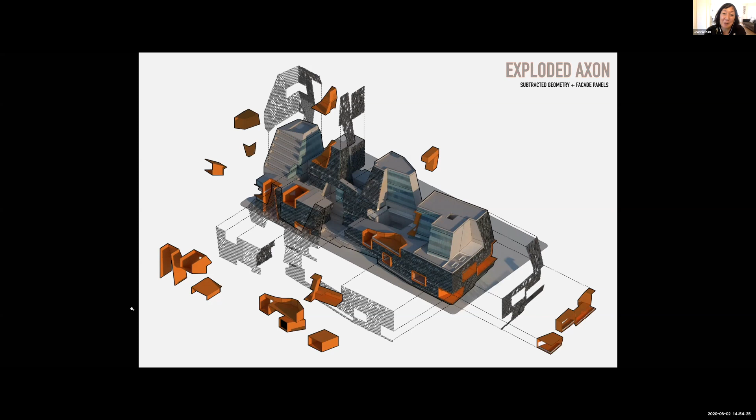Well, it's because the years before we did, so we took that same double program and we made a series of high rises that were 70 stories high. It's actually an easier program because the footprint is so small, and the core is so specific, that it really does dictate a way of organizing space, much easier than when you go to an urbanistic project that takes a massive landscape that has to be managed as well, which I don't think we're as strong at understanding, urban organization and larger campus type planning isn't part of our expertise yet, and we're working on that.

So Flatlanders is, I think, related to that idea, but also how in Los Angeles we are a horizontal skyscraper type community, and we take over massive landscapes of space, and yet we try to design within that these open spaces and life spaces and how it interacts with the city. So that's kind of what that title was.

I'm surprised you found that. Yeah. Thank you. Well, thank you everybody. Thank you, and it was lovely seeing everybody. It's really thank you, everybody. It was great seeing you guys.